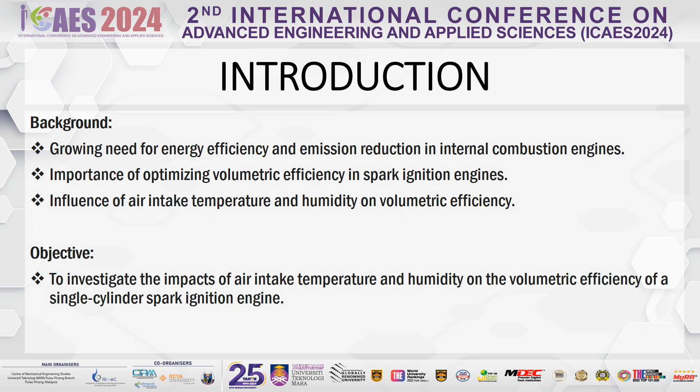Existing research has shown that higher air intake temperatures generally decrease volumetric efficiency by reducing air density, while increased humidity tends to improve efficiency by aiding charge cooling. However, most studies have focused on the individual effects of temperature and humidity. There is a noticeable gap in the research regarding their combined effects, particularly in single-cylinder spark ignition engines, which is the focus of our study.

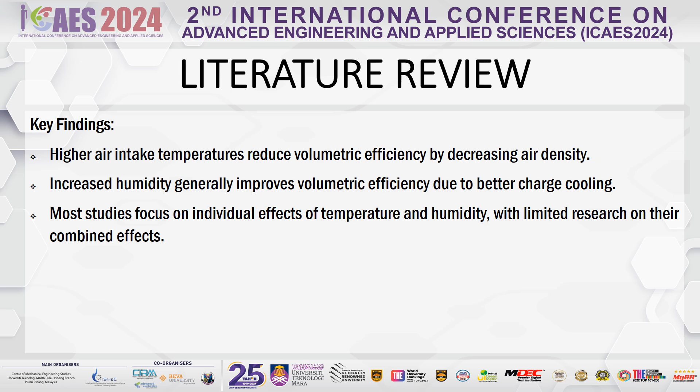This brings us to the research gap. While numerous studies have explored the individual impacts of temperature and humidity on engine performance, comprehensive research that considers their combined effects is lacking. Additionally, the focus on single-cylinder engines is limited. Our study aims to fill this gap by investigating how both factors together influence volumetric efficiency, thereby contributing valuable insights that could lead to better engine optimization strategies.

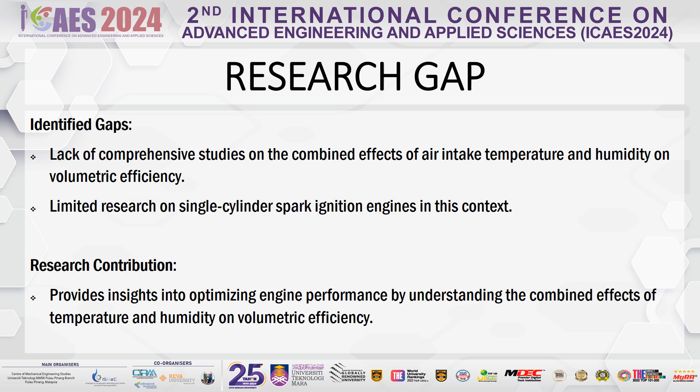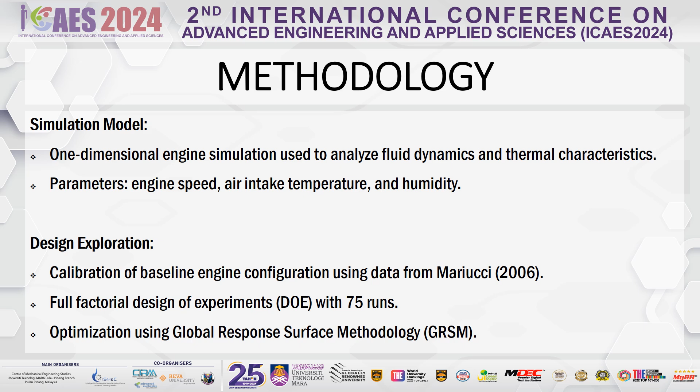In this slide, we explore the design of our experiment. The parameters tested included engine speeds ranging from 2,500 to 4,500 RPM, air intake temperatures from 26 degrees C to 34 degrees C, and humidity levels between 68% and 92%. We used a full factorial design to evaluate volumetric efficiency across different parameter settings. This comprehensive approach allowed us to understand the individual and combined effects of these variables on engine performance.

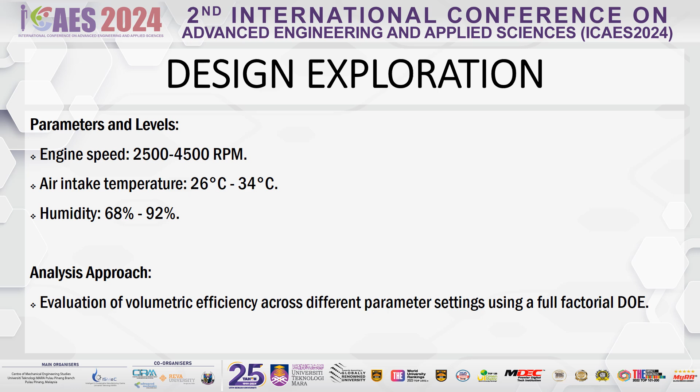Here, I'd like to highlight the specifications of the single-cylinder engine used in our study. This table shows the key parameters, including engine bore, stroke, compression ratio, and valve timings, among others. We validated our simulation model against the calibration data to ensure that the model accurately reflected real-world engine performance. The calibration results demonstrated good agreement, confirming the reliability of our simulation approach.

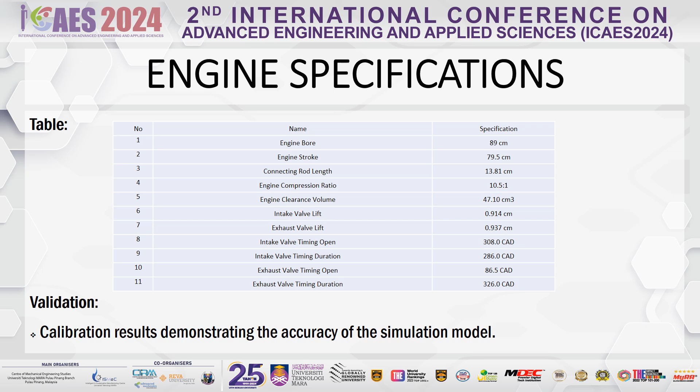Moving on to the results, our linear effect analysis showed a clear positive correlation between engine speed and volumetric efficiency, meaning that as the engine speed increased, so did the volumetric efficiency. We also observed a slight negative correlation between air intake temperature and volumetric efficiency, indicating that higher temperatures slightly reduced efficiency. Interestingly, within the tested range, humidity had a negligible impact on efficiency. The line graph here illustrates these trends.

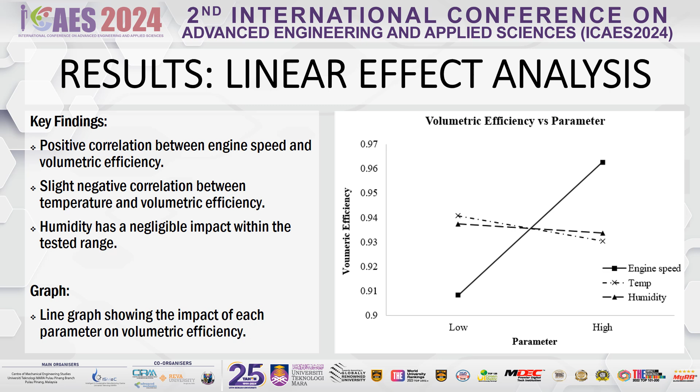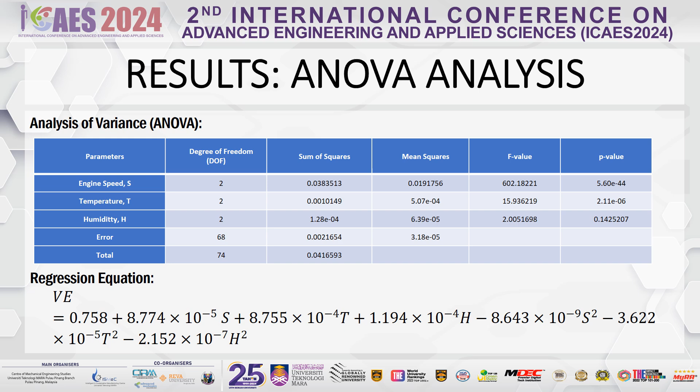To delve deeper, we conducted an analysis of variance, or ANOVA, which confirmed that engine speed and air intake temperature significantly impact volumetric efficiency. However, the effect of humidity was found to be statistically insignificant in this context. The regression equation shown here captures the relationship between these parameters and volumetric efficiency, providing a mathematical model for predicting engine performance under different conditions.

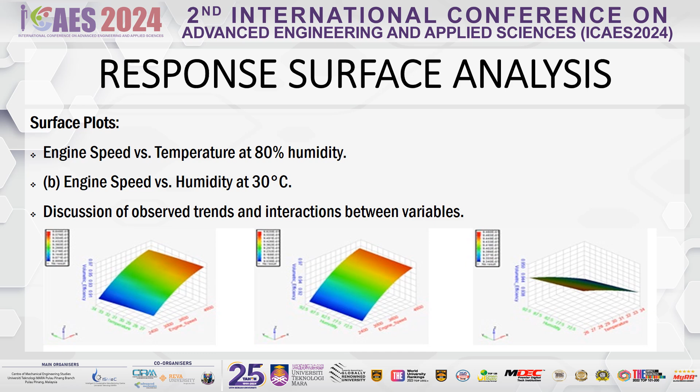Based on our analysis, we identified the optimal configuration for achieving maximum volumetric efficiency. The best result, a volumetric efficiency of 0.97, was achieved at an engine speed of 4,500 rpm, with an air intake temperature of 26 degrees C and 68% humidity. These findings underline the importance of precisely controlling engine speed and air intake conditions to optimize performance. By targeting these specific conditions, we can enhance engine efficiency significantly.

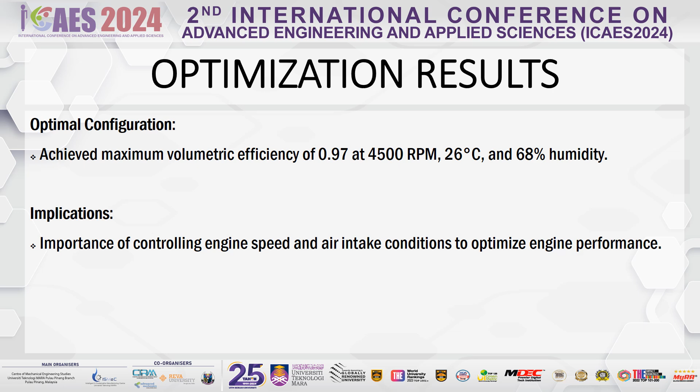To summarize our findings, engine speed emerged as the most critical factor influencing volumetric efficiency, followed by air intake temperature. While humidity's effect was minor, it shouldn't be completely disregarded, especially in certain operating conditions. These insights suggest that strategies such as intercooling, which reduces intake air temperature, could be beneficial in improving engine performance. The findings also open avenues for further research into how varying engine configurations might influence the role of humidity.

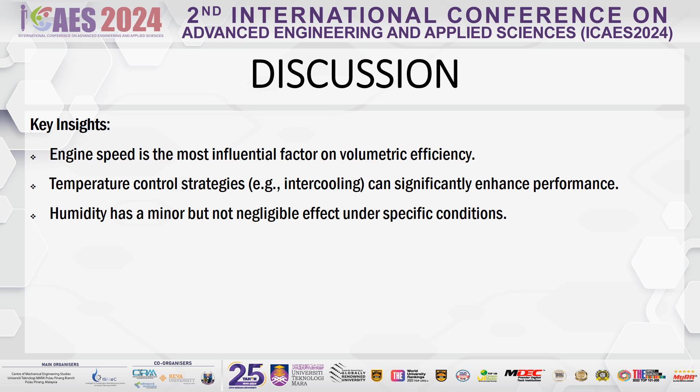In conclusion, our study successfully investigated the combined effects of air intake temperature and humidity on volumetric efficiency in a single-cylinder spark ignition engine. We found that while engine speed and temperature have significant impacts, humidity plays a relatively minor role. However, understanding these effects is crucial for optimizing engine performance. For future research, we suggest a deeper exploration of how different engine configurations might alter these dynamics and further improve volumetric efficiency.